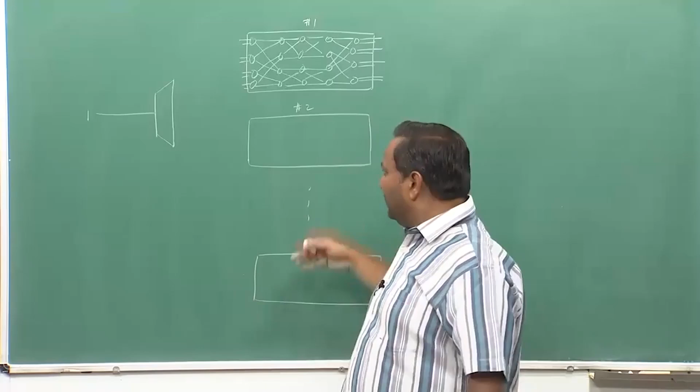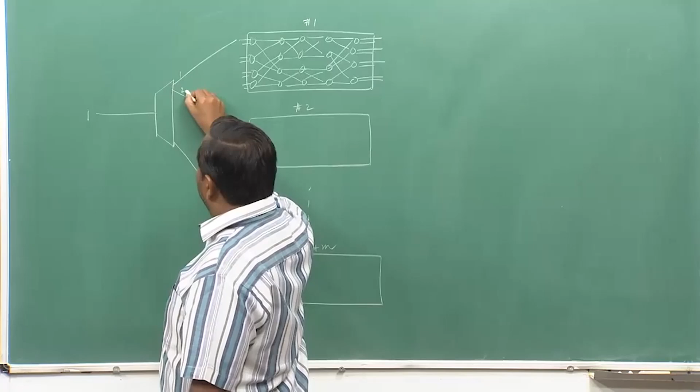Cantor came up with a very simple idea: let one input come in, I will use a 1 by m switch, and I will use m such switching paths. This is the first Benes network, this is the second one, and this is the mth one. Input 1 can be routed through this Benes network. Since it is a blocking system, if the connection cannot be set up via this, it can be set up via 2. If that is also blocked, it can go till m. So, this is 1, 2 and the mth connection here.

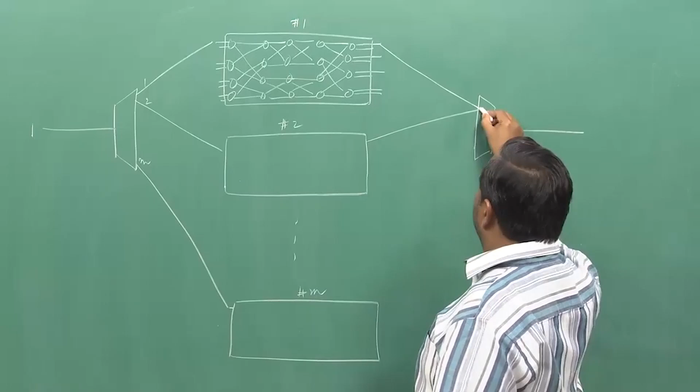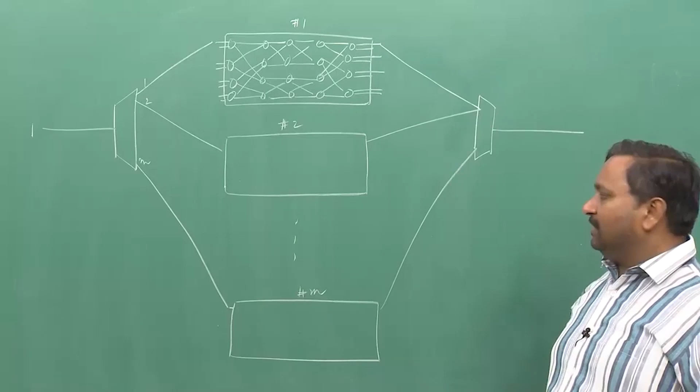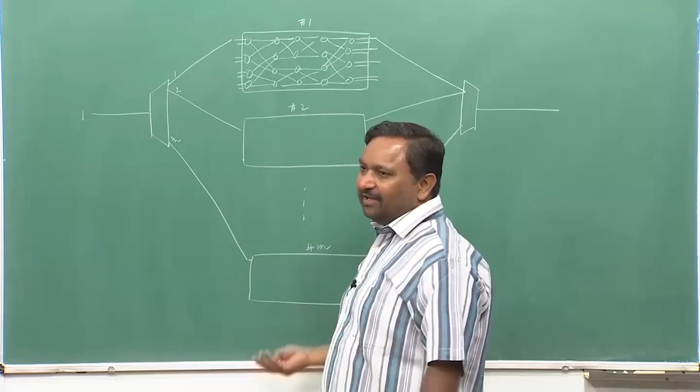On the output side we will have something similar: there is an output, and m lines from m different Benes networks will be coming and put together. This output will be connected to any one of them. If I keep increasing m, this switch should become strictly non-blocking. The question now is at what value of m this will become strictly non-blocking. We will investigate this now. I have to draw other inputs because there are actually n inputs, up to the nth one.

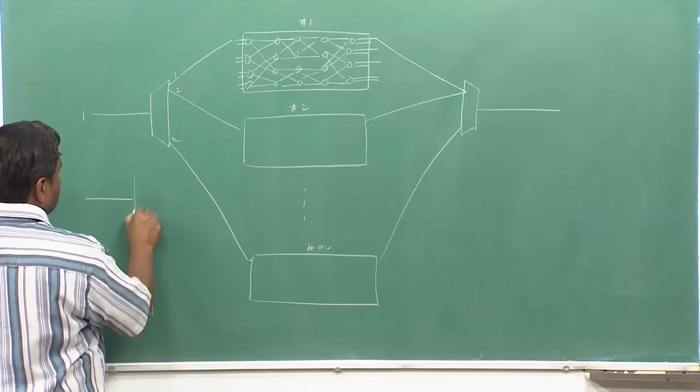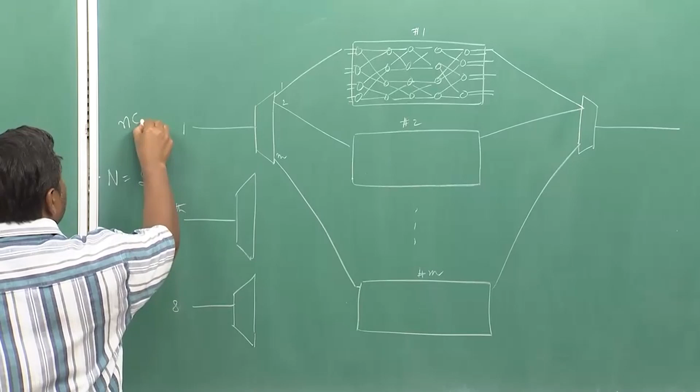I can have the ith input also; let me put something intermediate so that I can show the connectivity. So, in this case it will be 8 by 8, so the maximum value should be 8. In general it can be n by n, then we will have an n by n Benes network, and of course we are assuming that N is equal to 2 raised to the power n. So, n is a small thing and n belongs to the positive integers. So, I can call it the natural number set. So, n belongs to that and this is the size of N.

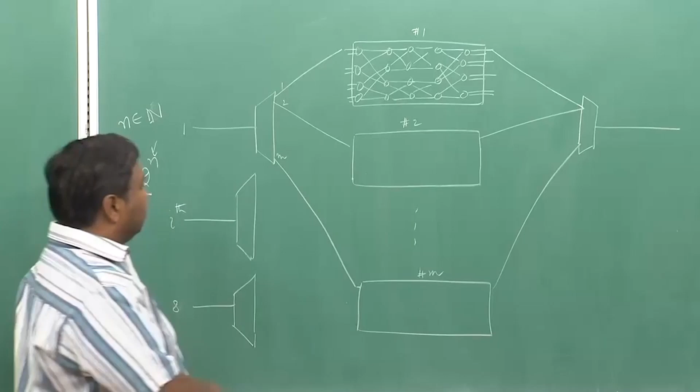In this diagram, because I have drawn an 8 by 8 Benes network, I will be having 8 inputs here. So, the first input in the ith switch will always be connected to the first switch and its ith input. So, if this is ith, which in this case is 5th, I should make it equal to 5. So, this will be connected to the 5th one. So, the ith switch here gets connected to the ith input, the 5th input of this particular switch, because the number of this mux or demux is 5.

So, similarly the mth here will be connected to the mth; in this case the ith input here will be connected to the mth input of this one. This logic will hold true for everything. So, this 2 will get connected here, this 2 will get connected here, and similar kinds of connections will be happening on the other side, on the output side.

So, I will have 1, and again I am taking some value, say I can call it k, and this is the 8, which is equal to N in this case. So, if k is 3 here, the third line will come up and connect to the first one, from the first switch. So, this will be 3. So, remember this port number corresponds to this input number, and this port number corresponds to this switch number. On this same side also this port number corresponds to this switch number. So, this correspondence is always done so that you can symmetrically construct this particular switch.

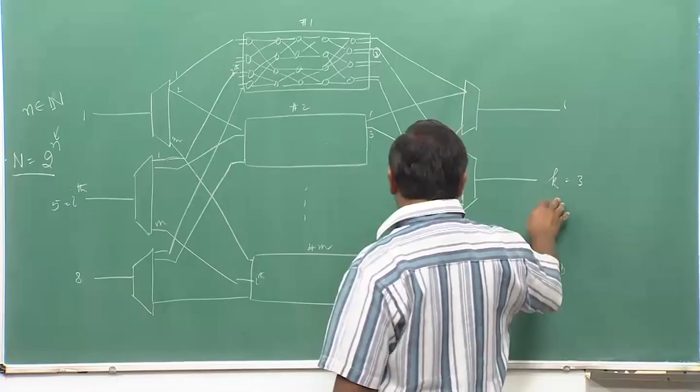So, now let us compute. We will do a very different thing this time. Let all the 7 other connections already be set up, and I have one free input and one free output which need to be connected. What I will do is try to find out to how many nodes in the first stage the free input can go, assuming all other connections have been made, and I will count not only these 4, I will count even these first stage ones also. There are first stage switches even sitting in here. So, I will count all these.

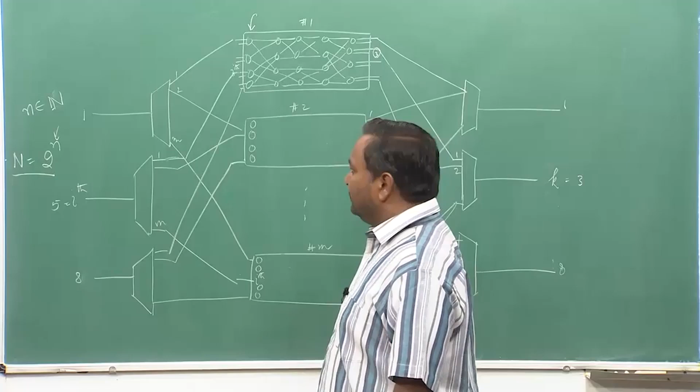So, in the first stage, in this case it is 32, 8 into 4 number of switches in the first stage which are present. So, how many of them will one be able to reach, or whatever is a free port? Let me assume it is 1; it is true for any one of the input ports. If it is true for 1, it can reach 1 here, 1 here and 1 here. So, it can reach in total m, which is equal to 8.

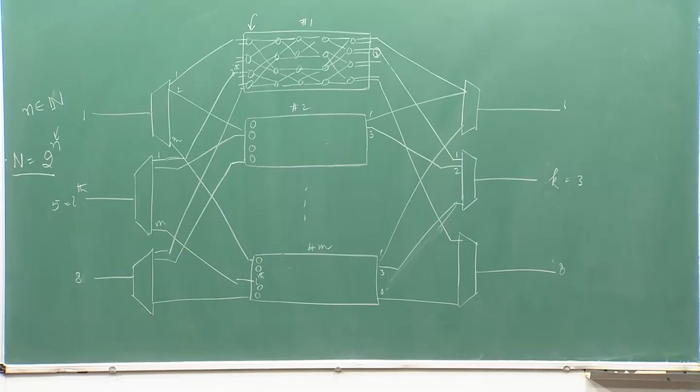So, I define this number, I define A_K as the number of, and I call each one of them a node, so the number of nodes which are reachable in the worst case in stage K. So, A1 in the first stage, what is the value of A1? It will be m. In this example, it will be 8.

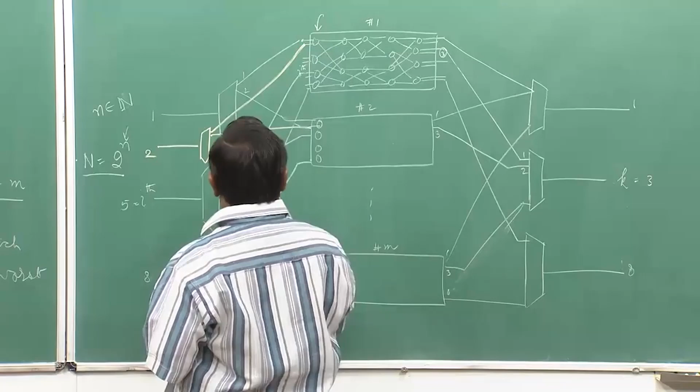So, now you can actually see all these 8 switches, this one, this, can now actually be reached by 2 inputs, one, and if there would have been another one. Let me draw it with a different color. It is there, I have not drawn it. So, 2 is sitting somewhere in between. Let me just draw it for clarity. So, this 2 will also be connected to the same port, this 2 will also be connected to this same port. So, 1 and 2 are on the same switch. So, amazingly this one and 2 are both able to reach the same set of nodes in the first stage.

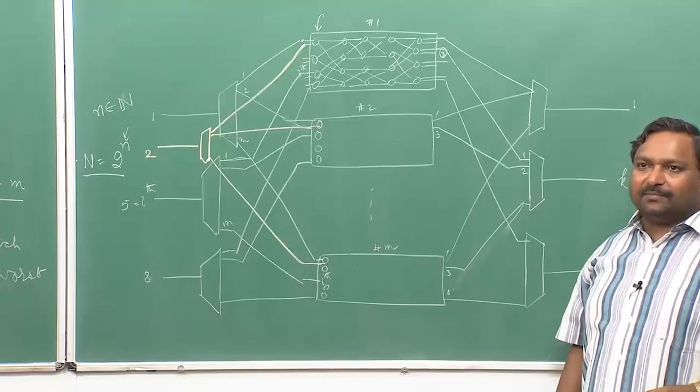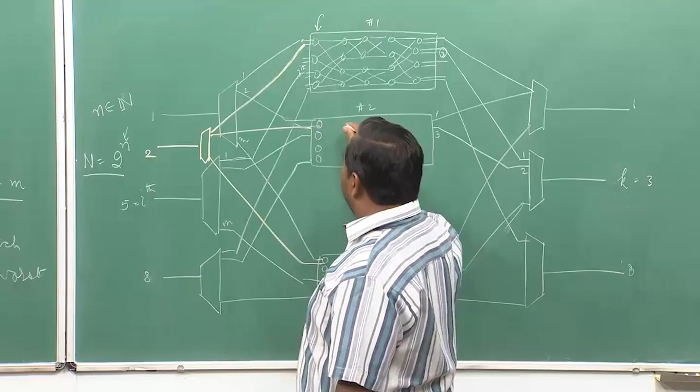And since I am assuming that all other inputs are busy, when you look into the second stage, how many nodes are reachable? From this node it can reach these 2, from this node again it can reach these 2, from this node also again it can reach these 2.

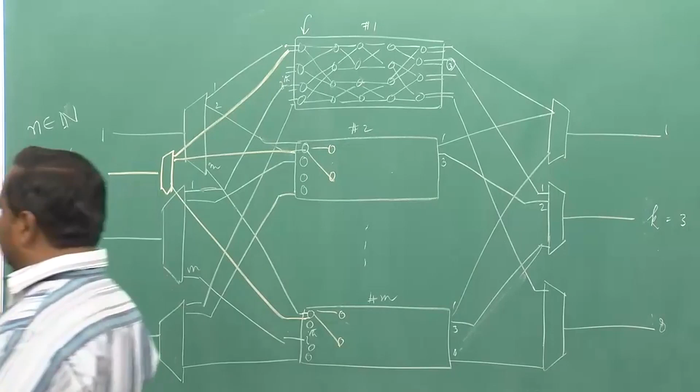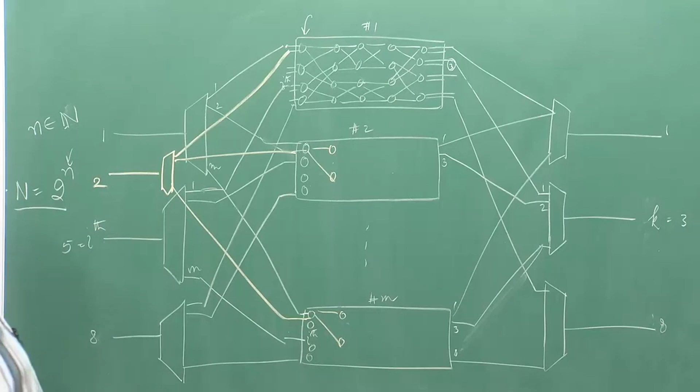But since 2 is already connected, it should be actually connected with one of these 1, 2, 3, 4, 5, 6. So one is already occupied. So the number of nodes which are reachable in the second stage, A2, should be twice the number, because each one of these switches is connected to 2 nodes in the next stage. In the third stage it will be again twice whatever is reachable in the second stage.

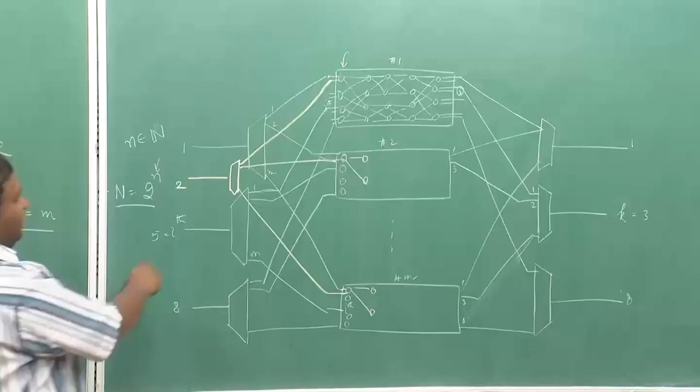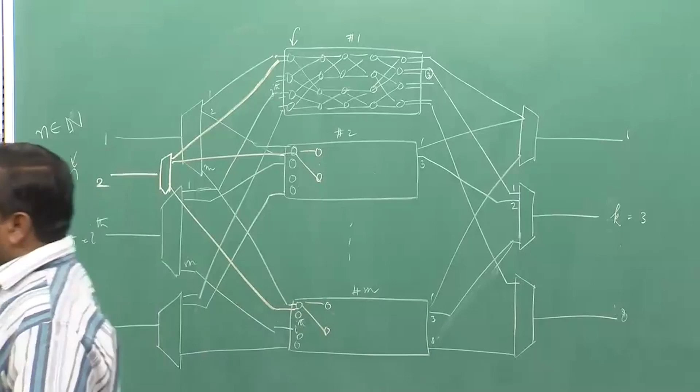So A2 should be equal to 2 into A1, but as I said, input 2 is already busy, it is already connected. So one of them has to be subtracted. The interfering one, the 2, has to be there, so one node has to be made less. Whatever nodes are reachable by A2 can further reach the third stage, and A3 will be twice of A2, but minus how much?

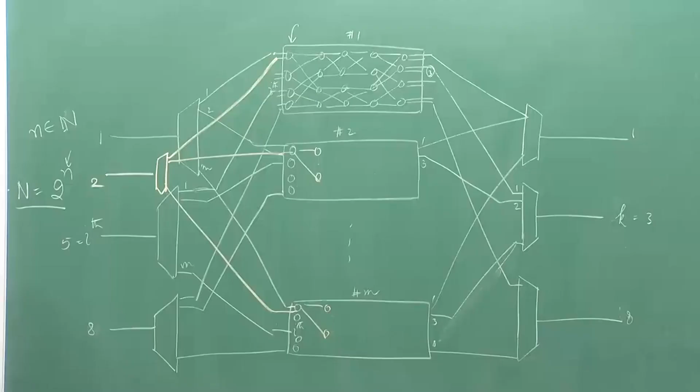Now, when I look at these 2 nodes, they are reachable from the third and fourth inputs also, and I am assuming they are also occupied. Similarly, these 2 can also be reached via these 2 ports, which correspond to the same third and fourth inputs. If they are already connected, it means 2 of these links going out from here are going to these.

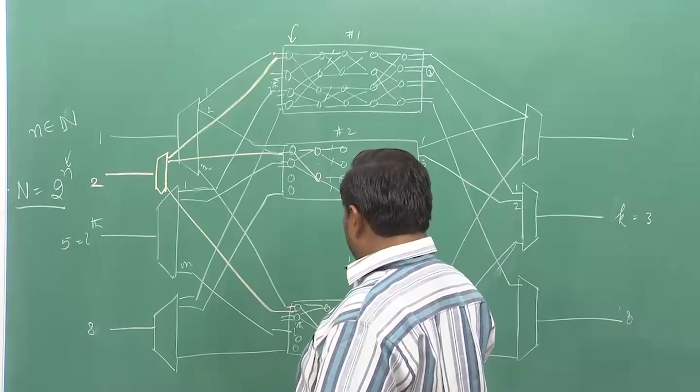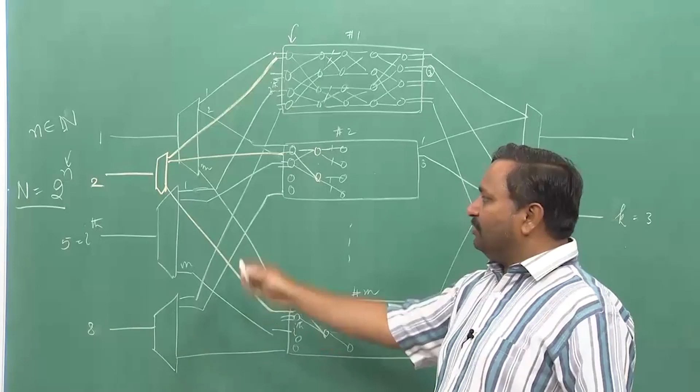So, this one which I am now putting, these are actually 1, 2, 3, 4, so 4 into whatever is the 8 actually, whatever numbers are there here, m, 8 into m. So those many switches are reachable now, but 2 of them will be occupied by the third and fourth inputs. So now it has to be 2 raised to the power 1. In general, if you take a larger switch,

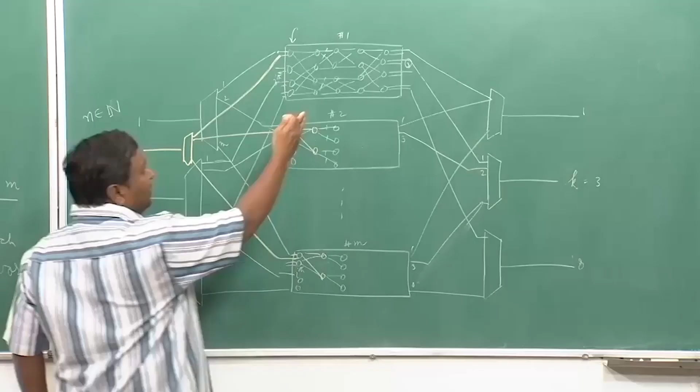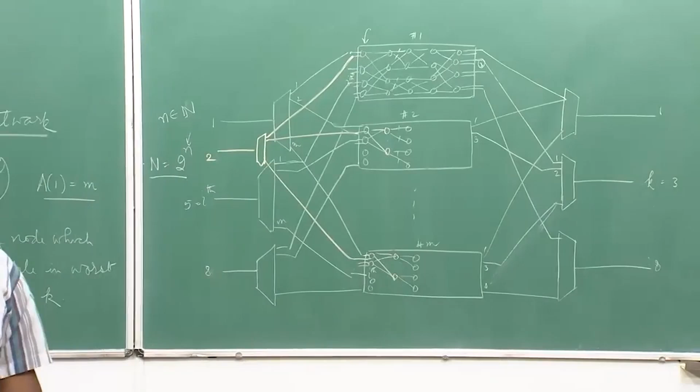you will find that A of k... Now remember, I cannot go any further than the middle stage, only up till the middle stage. So here I can only have A1, A2 and A3, I cannot compute A4 here. I would need a 16 by 16 switch to compute A4 and 32 by 32 for A5 and so on. So Ak will be given as 2 Ak minus 1 minus 2 raised to the power k minus 2. So you can actually see the relation.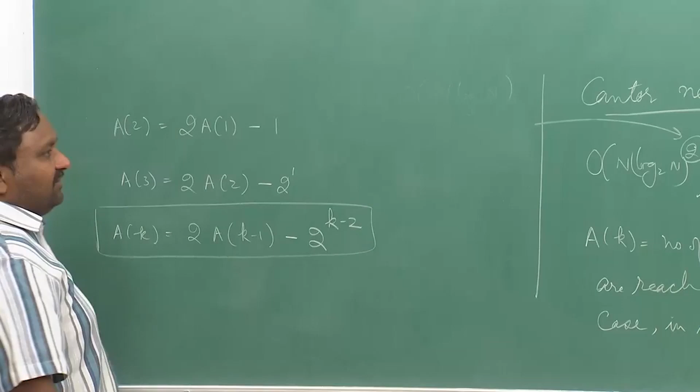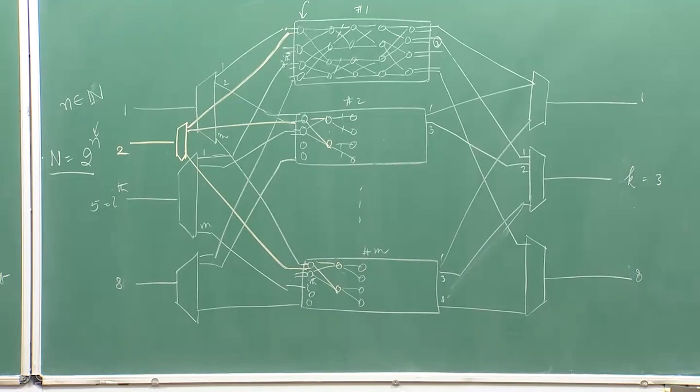Once you have got this relation of reachability, I am always interested in finding out, in the worst case scenario, how many nodes I can reach in the middle stage from the free input 1. So let us do that. We have to do a recursive computation. I can use this formula and put an expression for Ak minus 1 using the same recursion and compute what Ak is in totality. Let us see.

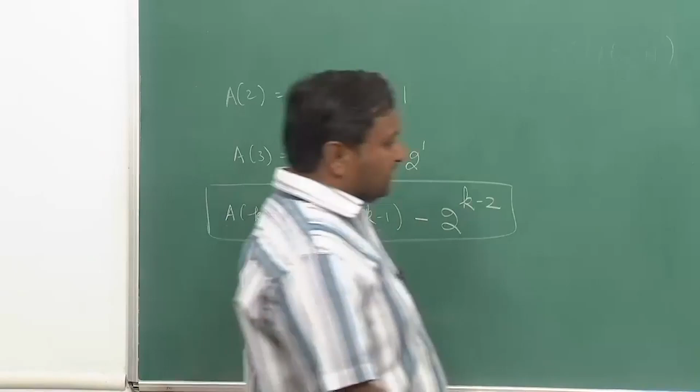So once I have Ak given here, I can now put in the Ak minus 1 expression. Using the similar thing, it will be 2 into Ak minus 2 minus 2 raised to the power k minus 3, minus 2 raised to the power k minus 2. So I have expanded this, and if I solve it, it will be 2 square Ak minus 2, this 2 will get multiplied here, and it will become 2 into 2 raised to the power k minus 2.

I can keep on doing it, and if I keep on doing it, I might get 2 cube Ak minus 3 minus, and so on, once I reach 2 raised to the power times A1. So here it has to be... Remember, when you sum this and this together it will always come out to be k. So it is 1. So it has to be k minus 1. When you sum these two it will be equal to k.

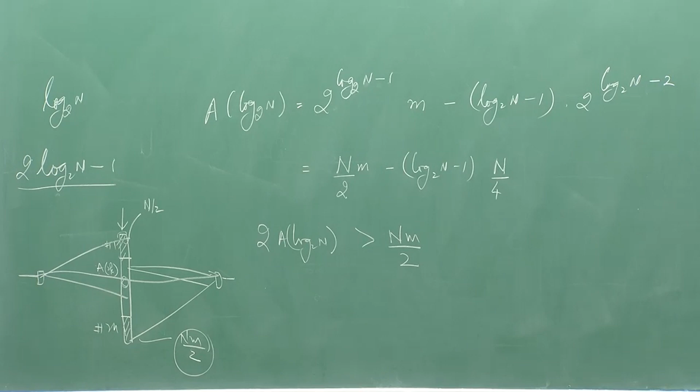Okay. So, in that scenario I have to simply take 2a log 2n should be greater than nm by 2. This is the condition for strictly non-blocking operation of the Cantor network. So, I can put a log 2n from the above expression. It will be 2 times nm by 2 minus log 2n minus 1 into n by 4; twice of this has to be greater than nm by 2.

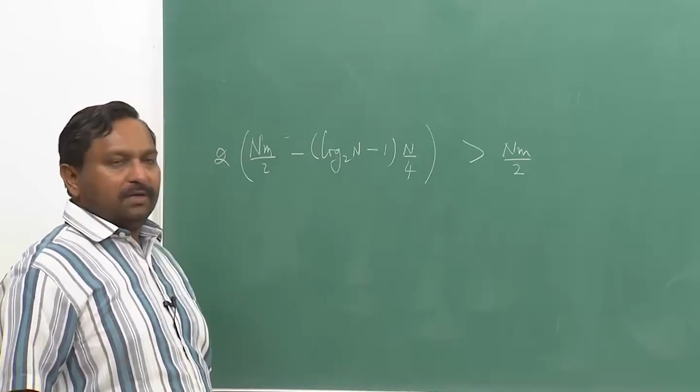Okay. So, once I do this, this 2 will cancel and this will become 2. So, this minus this will be nm by 2. This term I can take on that side, it will become positive. 2 cancels, n cancels, m has to be greater than log 2n minus 1. This implies m has to be greater than or equal to log 2n. So, if m satisfies this condition, the switch will be strictly non-blocking.

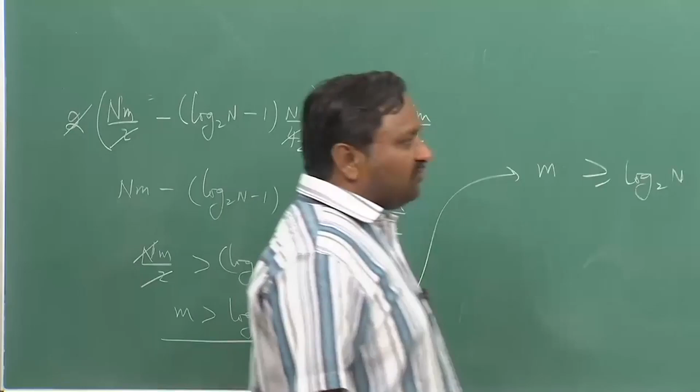Now, let us compute the number of cross points required in total for this switch. I used demux, a 1 by m switch, where m is log 2n, and there are n such 1 by m switches. Then I used Benes networks, which are n by n, and m such Benes networks, and then there was an m by 1 switch, n such switches used.

Now let us compute the total number of cross points. This one requires m cross points, there are n such elements, so m into n. Each Benes network has n by 2 switches in every stage, and 2 log 2n minus 1 stages. So, n by 2 into 2 log 2n minus 1, and each 2 by 2 requires 4 cross points. We have m such networks, so I put an m here, plus on the other side m by 1: m cross points and n such switches, so m into n. This is the total number of cross points required.